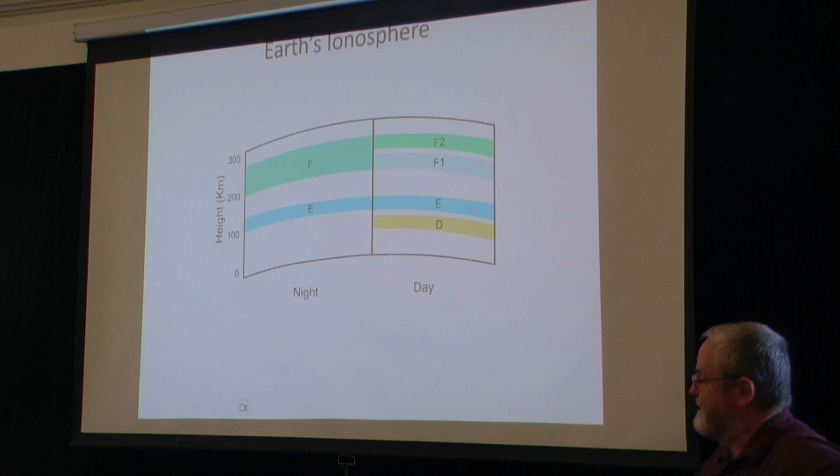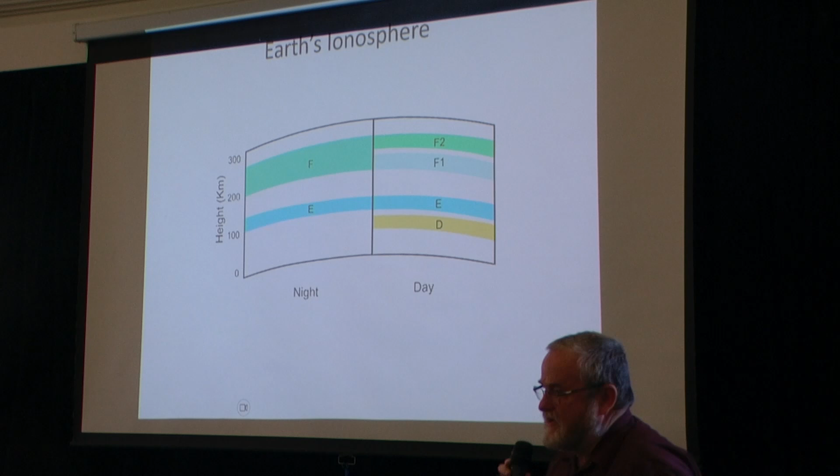So just a 30-second refresher on the ionosphere. I think most people in this room will have a good working knowledge of it. The section I'm interested in is the nighttime ionosphere, so I've distilled it down to just two basic layers.

The E layer, which was predicted in 1902 independently by two researchers, an American engineer, Kennelly, and a British polymath, Oliver Heaviside. Both hypothesised that there must have been some kind of refracting layer in the Earth's upper atmosphere. This wasn't proven until 1924 by another British physicist, Edward Appleton.

In addition, Edward Appleton also identified another layer which was known for a period as the Appleton layer. We know it as the F layer. For that investigation and discovery, Appleton was awarded the 1947 Nobel Prize for Physics.

So it's upon those two layers that all our international broadcasting between 2 and 40 megahertz depends. Without the ionosphere, without our atmosphere, without the stimulation of the atmosphere by the sun's emissions, we would not have international shortwave transmission as we all know it.

During the 1920s and the 1930s, broadcasting was kicking off around the world, and Australia, as always at the time, was crippled by the tyranny of distance. Beyond medium wave broadcasting, Australia had an imperative to look at economical broadcasting to more dispersed populations.

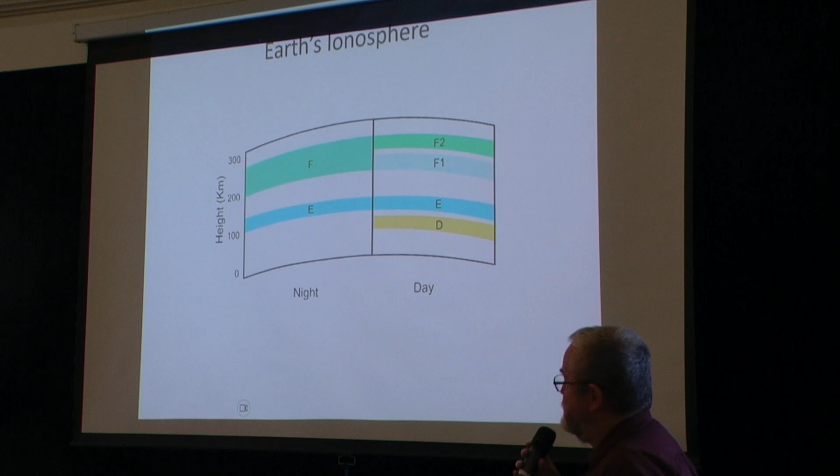To that end, in the late 1920s, the PMG radio branch established an experimental facility at Lyndhurst, just southeast of Melbourne, which was out in the sticks.

This photograph, I'm sure many of you will have seen before, purporting to show the early transmitter sites. That's actually a shed, that's the outdoor dunny on the left, that's a shed at the back of the Lyndhurst post office. There's not a transmitter inside, it actually held a couple of receivers and miscellaneous odds and ends, but it was on that site that the PMG radio branch, as opposed to AWA and its own commercial sites, began doing investigations into shortwave transmission.

So initially it was an experimental facility, and so late 1920s it had an experimental call sign. Anyone want to hazard a guess what that call sign was?

No, that was AWA. It's in Lyndhurst. It's a radio facility: VK3LR. The current VK3LR here, do we? The person who holds that call sign today, I hope they're aware of the legacy behind it.

I worked out that HF was quite a good vehicle for carrying broadcast programming to the inland and the islands, and so that was regularised from the late 1930s through until, in Lyndhurst's case, the mid-1980s with the call sign VLR and other related call signs.

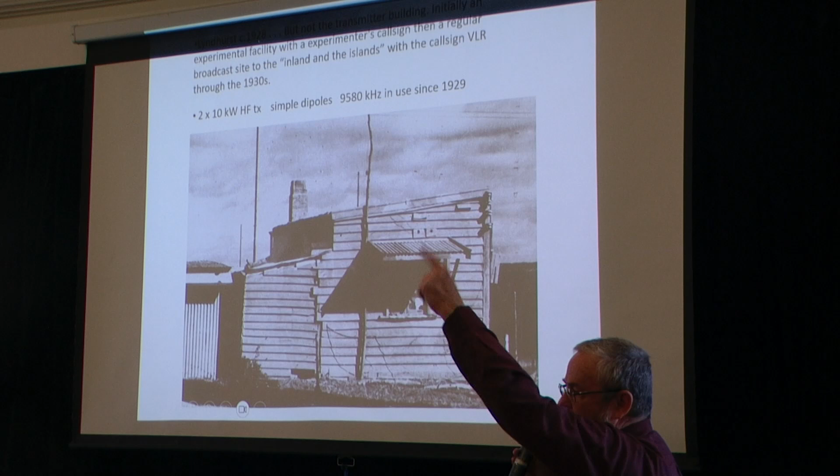So the transmission facility during the 1930s was quite basic. A couple of 10 kilowatt transmitters, simple dipole rows, so they were typically stacked dipoles without any reflector. So what you probably find in our amateur radio books described as a lazy H array: one horizontal dipole, half a wavelength above that, another horizontal dipole. It's a very easy way of getting considerable gain because you compress that vertical angle without generating myriad minor lobes.

The frequency 9580 kilohertz was in use from that site from 1929, and of course that became a very well-known frequency used by Radio Australia right up until its close, for transmissions into the Central Pacific and by extension into North America.

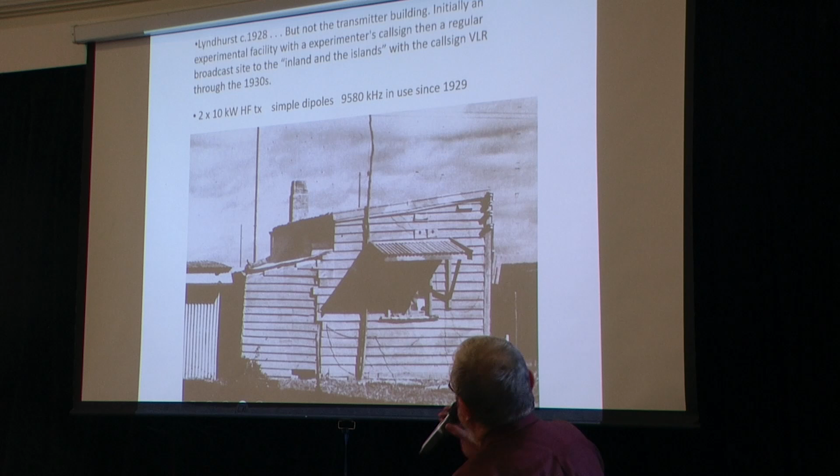And if you couple 9580KHZ with gmail.com, you've got my email address.

So we've moved apace, we're near the end of the 30s, we could all see this coming. Well, a few of them couldn't. As Churchill said, you had a choice between dishonour and war. You chose dishonour, but you will have war. And so it came to pass in September, we found ourselves again at the start of another world war.

During this period, Germany was miles out in front with its international broadcasting service, and the BBC wasn't far behind. The BBC was concerned it might lose its facility at some point. It knew it was within range of Luftwaffe bombers, so there was strong encouragement from the UK government to the Australian government to beef up its international transmission on a global basis. So not just looking at our immediate concern of Southeast Asia and the Pacific, but establishing a world-class, world-reaching HF transmission facility.

Initially, it was carried on the 10 kilowatt transmitters from Lyndhurst, but something better was required, and it was proposed by a British junior director of the BBC called George Ivan Smith. He was quite young at the time, had an illustrious career in the diplomatic corps, and I met George Ivan Smith out at ABC Radio Australia in 1989 on the occasion of the 50th anniversary of Radio Australia.

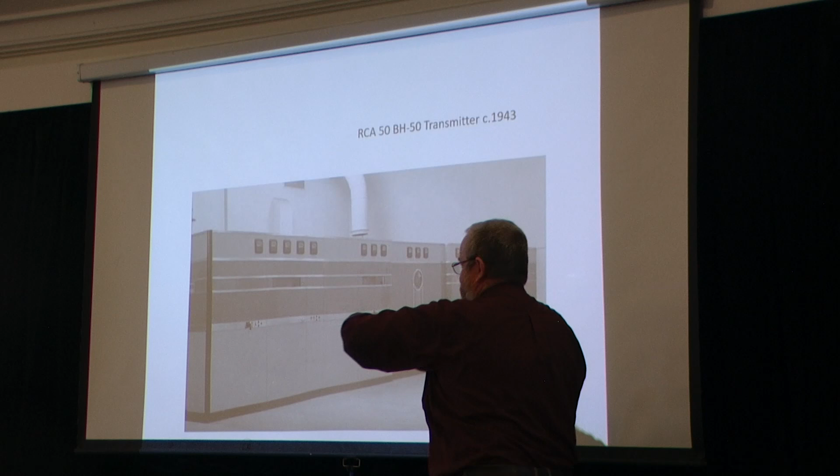It had an open top, and during the 50s or 60s the occasional hijinks went on - for a period of time, flying model aeroplanes were in vogue. Can you imagine flying 1950s or 60s model aeroplanes with little regenerative receivers over the top of 50, and just on the left-hand side, 300 kilowatt transmitters? Is there any RF floating around? Yes, probably about 150 volts a metre. So to try and improve reliability, they actually built in over the top of that transmitter, and that's how I remember seeing it.

So I mentioned that the RF stage had a pair of fat triodes in push-pull. That was an RCA 880. I've got one at home from Shepparton. Do you think I can find it? It's not all that big - it's probably about 600 mil high, but quite an impressive beast.

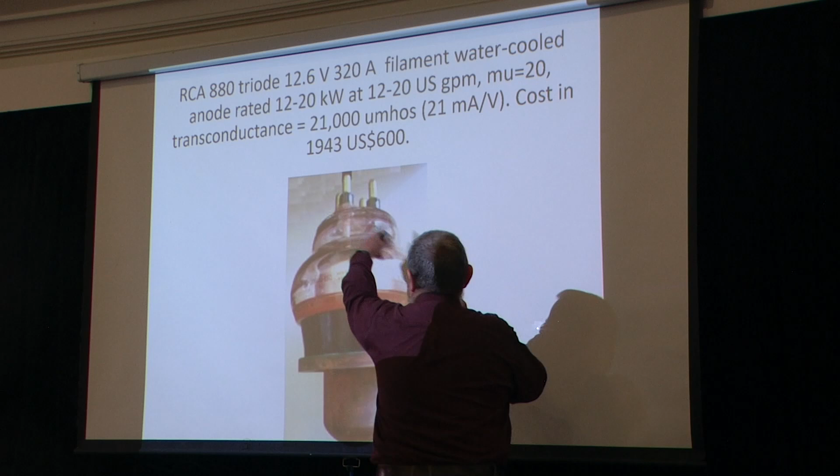If you're familiar with some of the other water-cooled 20 kilowatt valves, you've got the filament structure here, and a massive great projection out here. This one's folded back, so that anode continues up to about this point, which made it quite good for high frequency work. You'll notice the filament is rated for 12.6 volts, so it's ideal for mobile work.

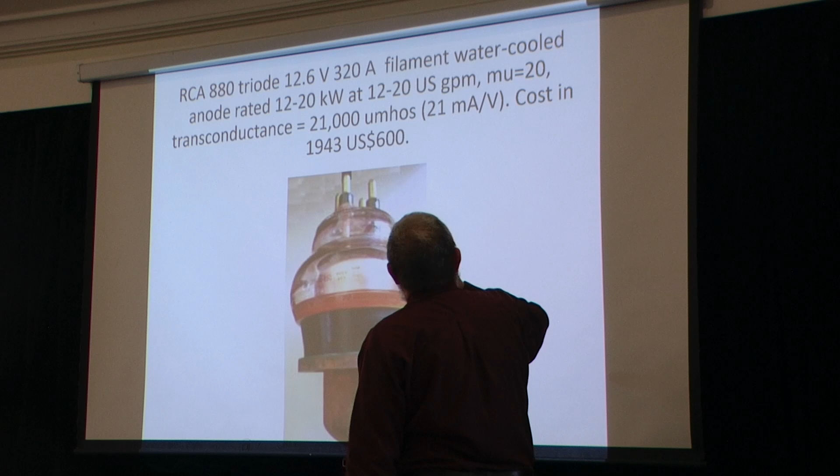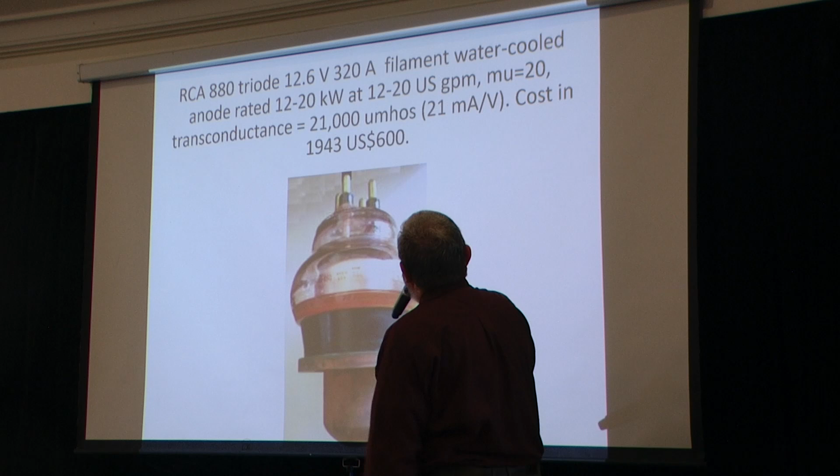Also, I'll let the Yanks get away with using these stupid US gallons - your anode rating is proportional to the gallons per minute you're pushing past that anode. I thought the transconductance was pretty impressive - that's a non-trivial transconductance. That valve, in 1943, I looked it up before I came here.

813s were $22; 833 triodes, common in broadcast use, were $76. This one's a bit dearer - it wasn't the dearest one at the time though. There was one that was $1,200, an 889, I think, from memory. Those valves are still available from a number of manufacturers, not just RCA, but also General Electric and Machlett.

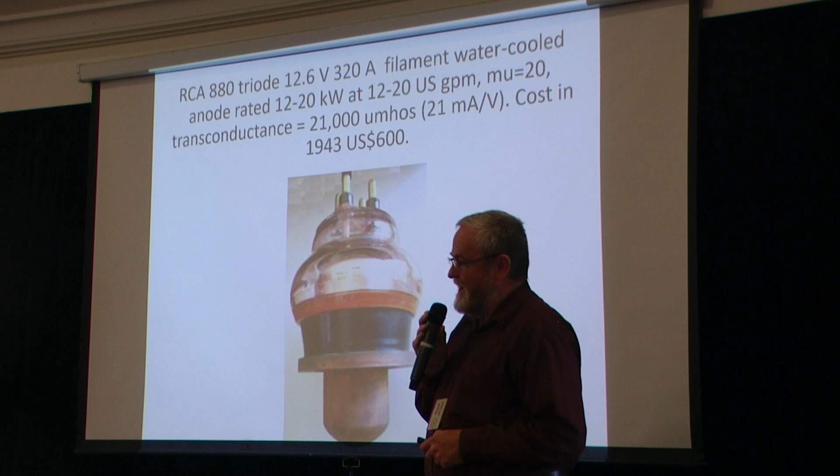So we've got these impressive transmitters, broadcasting all around the world. As many of you will appreciate, the number one feature of a transmitting station, particularly an HF transmitting station, is its aerial complement. It's all in the aerial - it begins and ends with the aerial. So we had quite a few of them. These were single band, first generation curtain dipole arrays.

So we've got a transmission station here on Verney Road. Those feed lines, 2,400 wooden poles across the site, which is why they shied at broken beer bottles - there's $1 for the swear box. Is Randall here today? I'll give him $1. There were these poles across the whole site, so they were very nervous about grass fires which periodically swept the site. Those feed lines are in the order of 3,000 feet, 910 metres long.

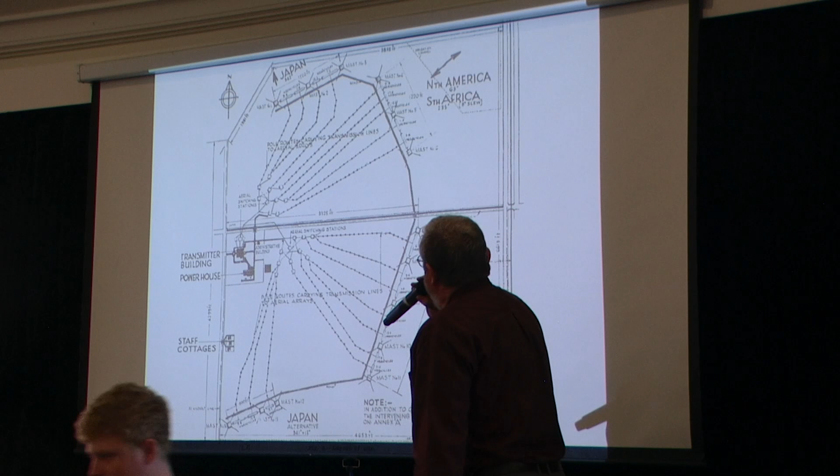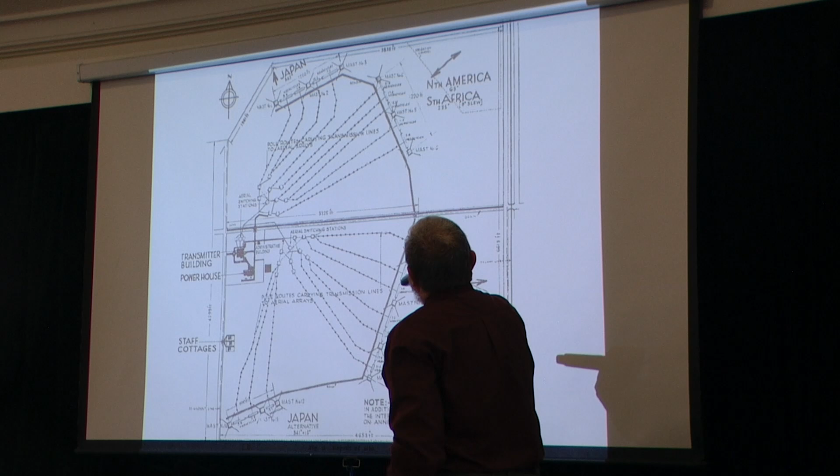So if we look at this one here, with a pointer - that one there - that's the 21 megahertz aerial for America, known imaginatively as A21. That 3,000 foot feed line at 21 megahertz had a loss of less than 1 dB. No poncing around with SWR meters - we put 50 kilowatts in, measured that, and at the input to the antenna panels we measured 40 kilowatts. There you go, 0.97 dB.

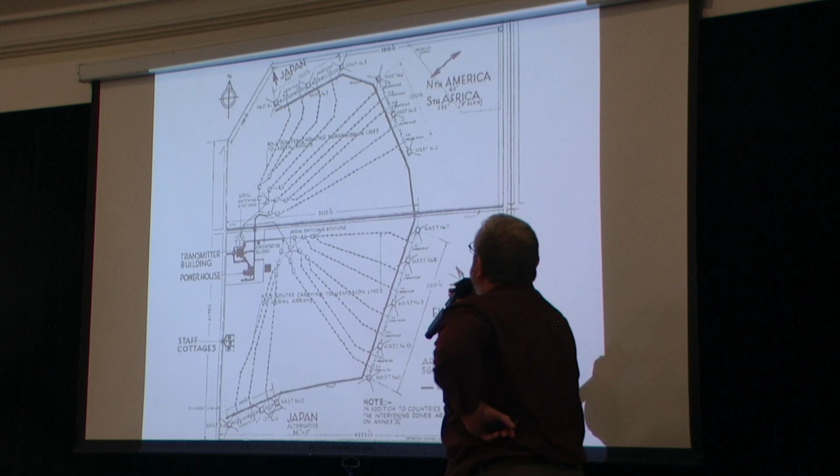So balanced feeders are certainly the way to go if you've got long feeder runs at HF. Now you notice that the bearing on those American group aerials is 63 degrees azimuth, which is quite useful because about 30 times a year you've got the moon rising up through that beam. That becomes crucial to our further discussions.

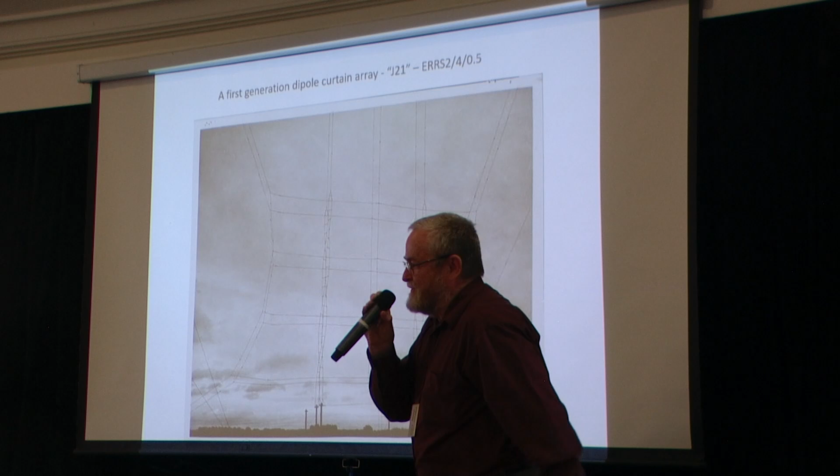Hand up who's read or who's got a copy of Radio 2. Good, right, okay, you can bequeath me a copy. I don't have one, I have seen one. You've got it? Terman - I need Terman, 1943 radio engineering, and a set of Radio 1 and Radio 2 would be delightful too. I'm prepared to cross your palm with gold, or donate to the charity of your choice.

So what we're looking at here is a first generation dipole array.

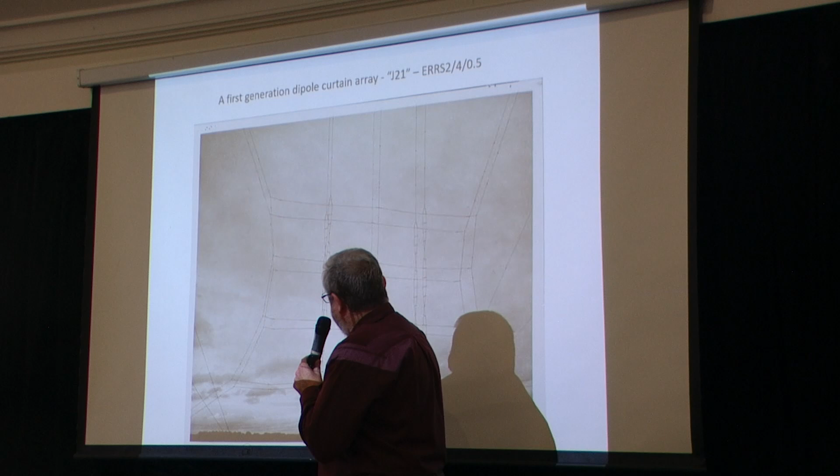We have four, and these are actually half a wavelength each. Okay, we've got 1, 2, 3, 4. So we've got 4 dipoles stacked vertically. This dipole's half a wavelength above ground, and there's half a wavelength between the ones above it.

And then immediately behind that we have an identical array of dipoles which are passive but attuned to function as reflectors. This is a one band affair, so about 2% bandwidth, not too bad.

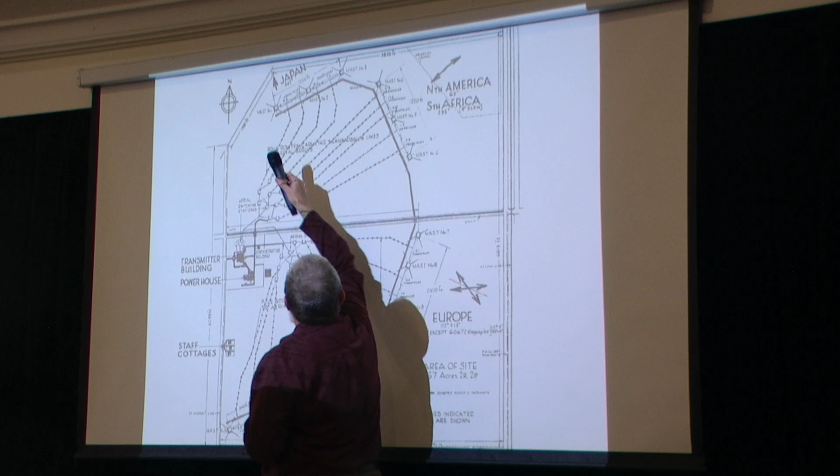This particular one was J21, so it's not an original. If you look at the J group, all those J group areas are still standing today. All these are gone and been updated. The J group, the J21 doesn't appear up there, so it came later, probably during the early 50s, but it's represented.

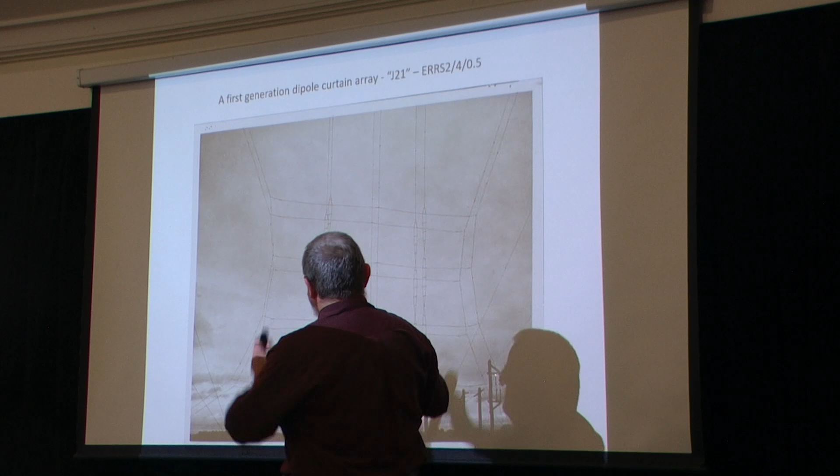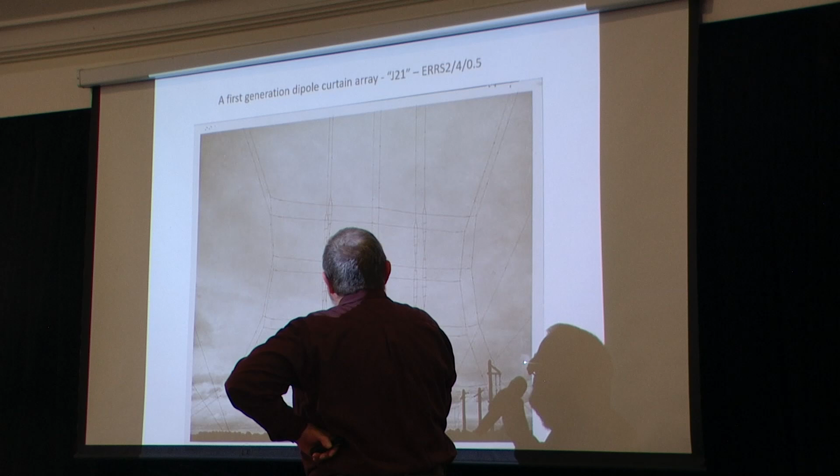So there's the 21 megahertz aerial. We're looking at front to back ratio about 15 dB. Azimuthal beam width plus or minus 18 degrees, and a take-off angle of 9 degrees, plus or minus about 4. So quite a constrained pattern, and a very clean pattern compared to

the other aerials which were in use at the time, particularly rhombics. Rhombics are cheap and cheerful. Some unkind people say that it's an aerial that radiates badly in all directions. It's certainly a grubbier pattern than that.

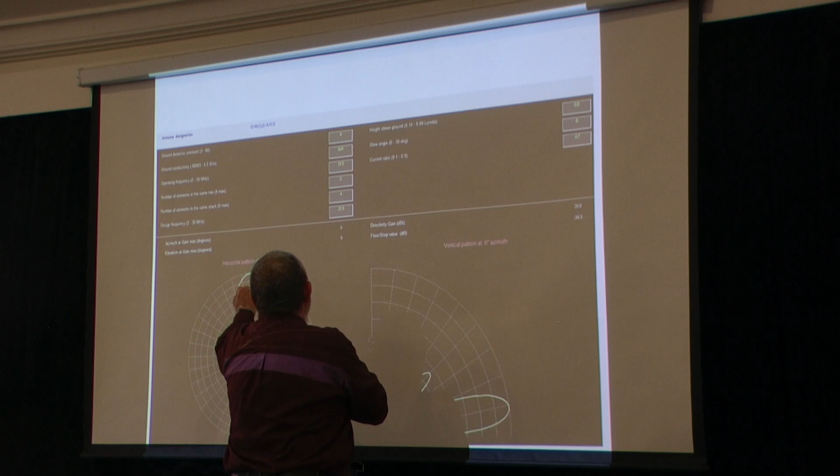So here's that aerial you were just looking at before. A single band aerial, so design frequency equals the operational frequency, and we've got a very clean lobe. The main lobe, plus or minus 18 degrees at the half power point, those are 3 dB increments. Take-off angle, 9 degrees. So the array is 4 half wavelengths high, so how many lobes in elevation do we expect to see? Also 4. And you can see that they're just there.

This is the one we're interested in. The other 3 we don't worry about. That one is 10, 20, 30, 40 degrees. 40 degree takeoff angle at 21 megs. It's almost certainly going to blast into outer space. We're not worried about that.

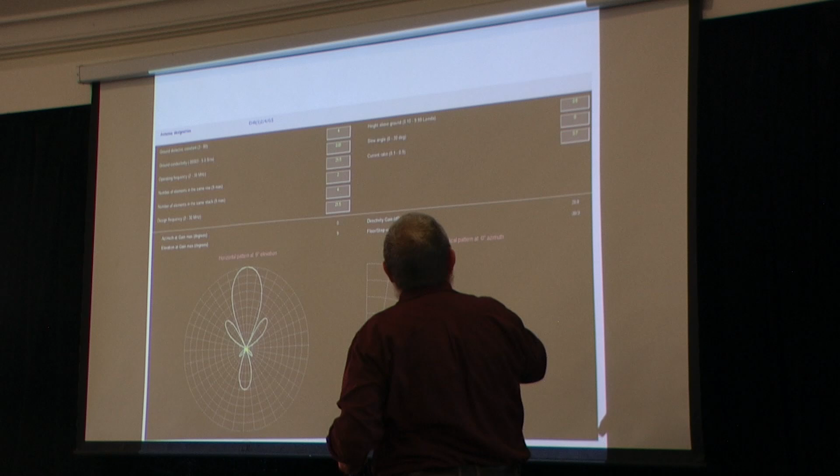So that was the aerial that attracted the interest of CSIR. And during the war, a lot of interest was taken in developing radar systems. So there are a lot of very brainy people who were working at these unspeakable frequencies of 200, 400, 900 megahertz, other unnatural environments, and they came to take an interest in what we could do after the war with all this technology and knowledge.

When was the first moon bounce, or first recorded detection of moon echoes, undertaken? Anyone offer an opinion? Go on. Americans were detecting Russian radar reflected off the moon in the late 1940s. That's interesting. In the 1940s, Operation something or other was American Army operators running a system on 111.6 megahertz with 800 watts of power, 1946.

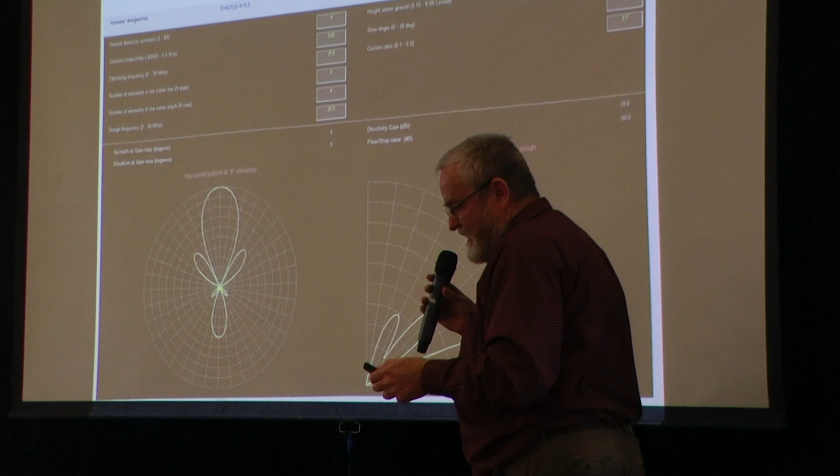But they were actually beaten by a pair of Germans, Wilhelm and Willy, in 1943, at a German radar research establishment. They detected the echoes of their radar transmissions from the moon. So it's actually 1943 that it was first detected, for some reason they couldn't write about it at the time. But there were also enterprising amateurs. Remember that there was no real distinction between amateur radio operators and bleeding edge radio propagation researchers at this time. Some of the amateurs were up there with the best of them.

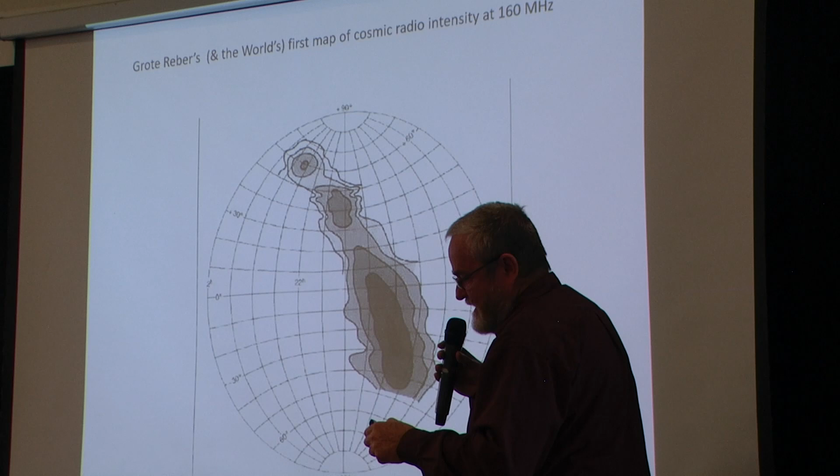This was just the start of what became a very enthusiastically invigorated field of scientific endeavour.

Let's go back to radar, 1942. This is at Dover Heights, just south of Sydney Heads. The radar on the left is a 200 megahertz facility. You'll notice that there are Army personnel in both cases.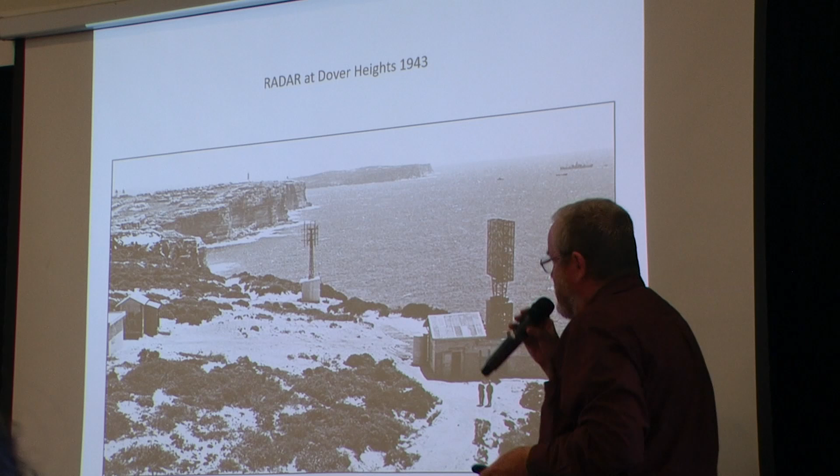The facility after the war was handed over to CSIR, who had just recently brought back... that's the aerial supervisor at Dover Heights. So this equipment was handed over to CSIR, who were getting together a lot of their former staff.

The chap on the right, all 192 centimetres of him, is Joe Pawsey. He was the head of CSIR's Radio Physics Laboratory, and he encouraged a lot of his budding postdoctoral researchers to investigate radio astronomy activity above 100 megs.

What's that? Come on, give me that. Thank you. You get the video.

That's a gamma match, not the best method of matching coax to a dipole, but it was popular for a few decades, and that was a brief legacy of this chap amongst amateurs.

But he had a much bigger impact on radio physics laboratory. The chap on the right is Alex Shain. Unfortunately, his brilliant career was cut short and he died of cancer in 1960.

The chap in the middle, always impeccably dressed with waistcoat, tie and jacket, was Charlie Higgins, what you'd call an STO 2 or 3 in the parlance of the day. He didn't have a PhD, but he had a brilliant mind. These two were working on radio astronomy at frequencies under 30 megahertz.

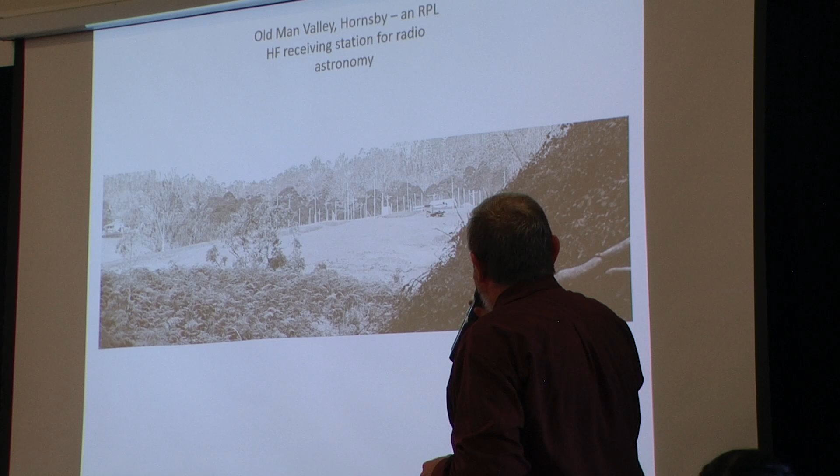So we have this site, Hornsby, some kilometres north-west of Sydney, I don't know exactly where. The old Man Valley's still there, it's now a BMX bike track. You can see it's quite a picturesque one.

They covered this area with dipole arrays, horizontal dipole arrays, using the ground as a reflector. Some were set up as transits, using the Earth's rotation so that the arrays would be phased at maybe minus 32 degrees declination, giving a transit sweep of parts of the sky. These guys were analysing the sky at 9.15, 18.3, 19.7 megahertz - frequencies we're not accustomed to regarding as appropriate for radio astronomy.

Shain actually made measurements of signals he was observing around 19.7 megahertz, and it wasn't until later that some Americans analysed his data and said they think they're coming from Jupiter. So Shain actually discovered the Jovian emissions, which were around about 15 megahertz.

So, Marty, what are those two valves up the top? No, you know what they are. Have a guess. You had a transmitter with a 2 or 3 or 4 of them in it.

A pair of 807s. This is built by PMG Radio Branch to mess around with the RCA 50 kilowatt transmitter. The three bigger tubes, the jumbo-based tubes, I think they're thyratrons - mercury thyratrons, judging by the messaging. I don't think they're xenon or hydrogen.

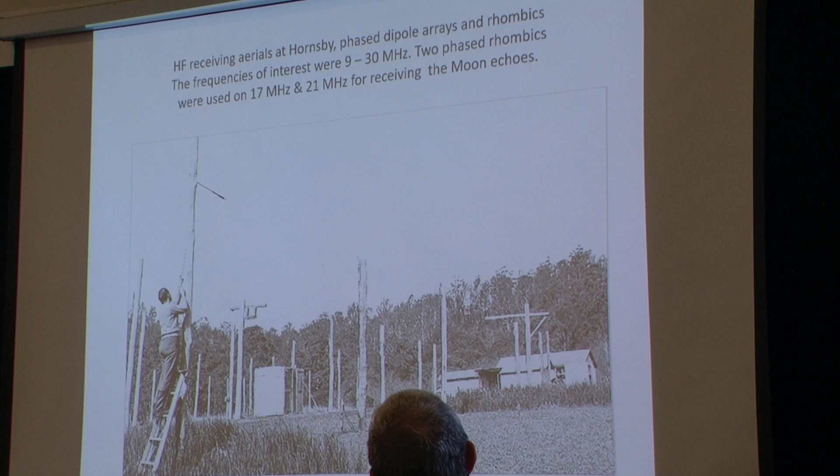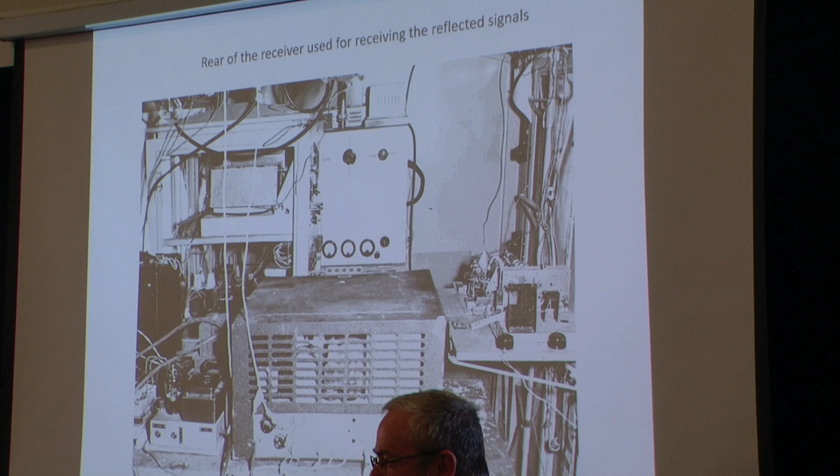This was some of the gear made to display the signals received from the moon echoes. The bottom part was a long persistence cathode ray tube with a persistence of around 6 seconds. Up the top we had aural detection, which as it turned out was about 2 to 3 dB more sensitive - so just using your ear was more sensitive than using the cathode ray display.

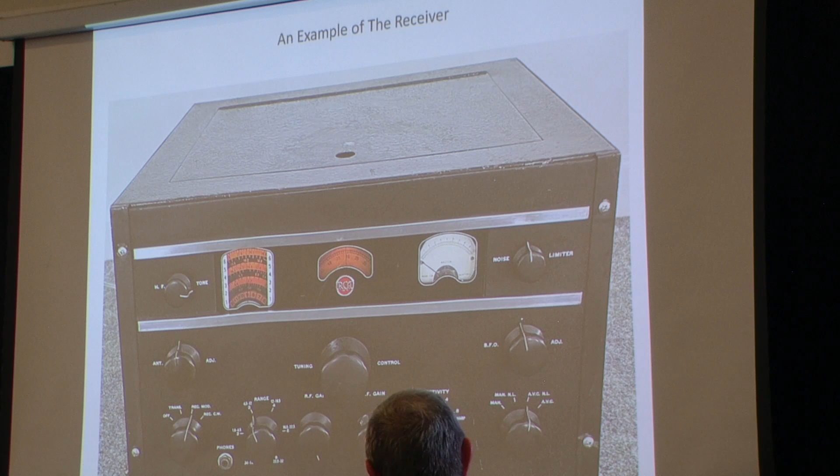Yes, there we go. It was an AR88, not that one. So there was a suite of signals.

Some of them were long pulses designed to analyse the signal coming back through the ionosphere. To locate the echoes in the first instance, they would send a series of 3 quarter-second pulses. The pulse gear was at Shepparton, keyed from Hornsby with a landline.

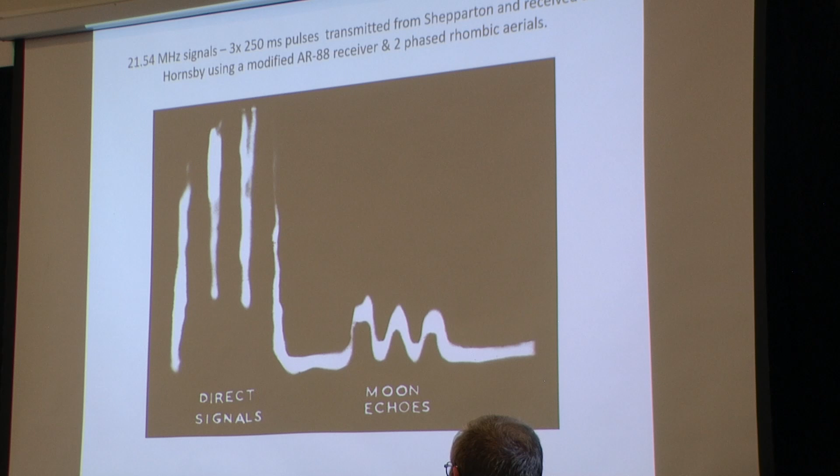So we're looking there at about less than a second of pulses. The fourth one is a little bit of E-scatter, and then you've got the moon echoes.

So once you've detected the signals from the moon, you could use a range of other pulses. These ones here, this is a display of 3 echoes. You see that they're fairly closely spaced in time. The echoes coming back are suffering interesting ionospheric degradation. This is at 21.5 megs.

And there's also another set of signals where they were sending 1 millisecond pulses at a 40 hertz repetition rate, which was designed to get a profile of the lunar surface.

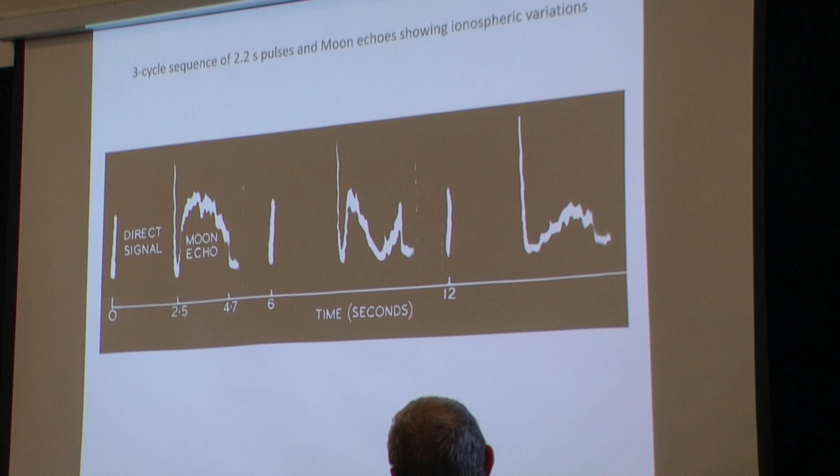This made such an impact, and I've got my notes - this made such an impact that in 1952... this was happening in 1947 and 48, there were 30 days where trials were undertaken and reflections received on 24 of those occasions.

There were 2 receiving sites in Australia. One was at Hornsby, and there was a secondary receive site at Rockbank, just out of Melbourne. That was run by OTC before Defence took it over, not quite as good a performance as the Hornsby site.

Anyway, so we had the International Union of Radio Science, which is still with us today. They had a congress in Sydney on the strength of Shain's publication. So Shain, a chap called Kerr and Higgins published in 1950, and it would cause quite a stir.

So that's an interesting photograph there. We see Edward Appleton, the chap on the left in the overcoat. He's a character who confirmed Kennelly and Heaviside's prediction of an E layer, and then went on to discover the F layer. The chap in the middle was Edward 'Taffy' Bowen.

He was the head of the radio physics laboratory, and then next to him we have the lanky Joe Pawsey, who was overseeing the radio astronomical research.

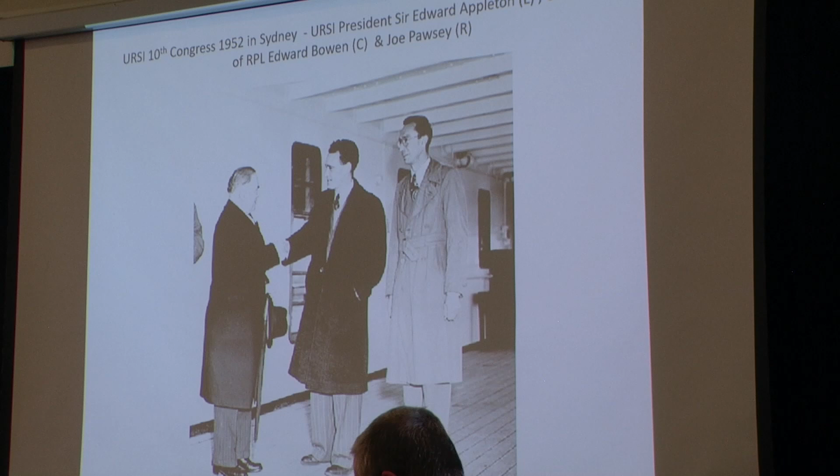So that's another slide. These are dignitaries from University. And of course, as a lot of researchers, you've got to publish it.

So they were surprised that the signal strengths were way below what they predicted. Now, bearing in mind, this was happening in June 1947 for about a year through into mid-1948. The T-index then, solar activity if you like, was about the same as it is now. So over that year it went between about 130 and 160 if you're familiar with IPS and T-index.

The tests had to be done at about 0200 to 0500 in the morning, because if you did it during daylight hours with a sunlit ionosphere, the frequencies wouldn't get to the moon, they'd get to North America, where the broadcasts were originally intended to go.

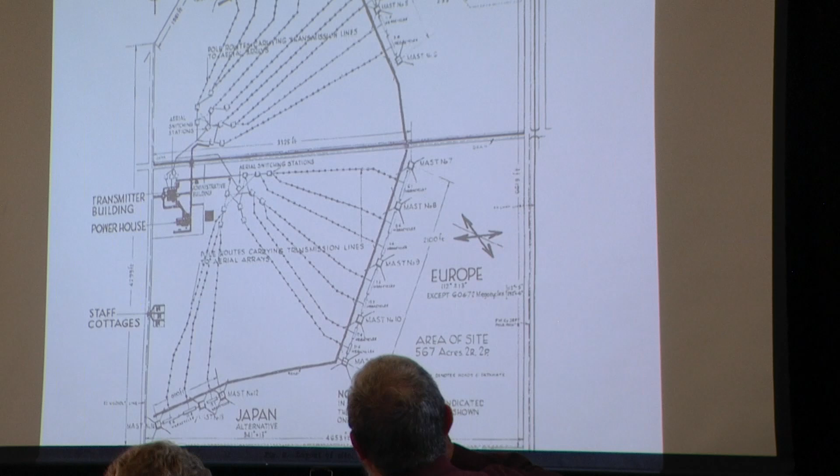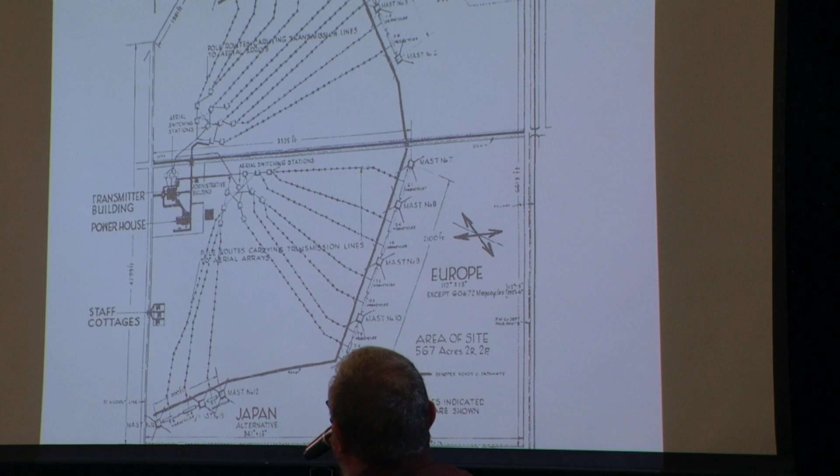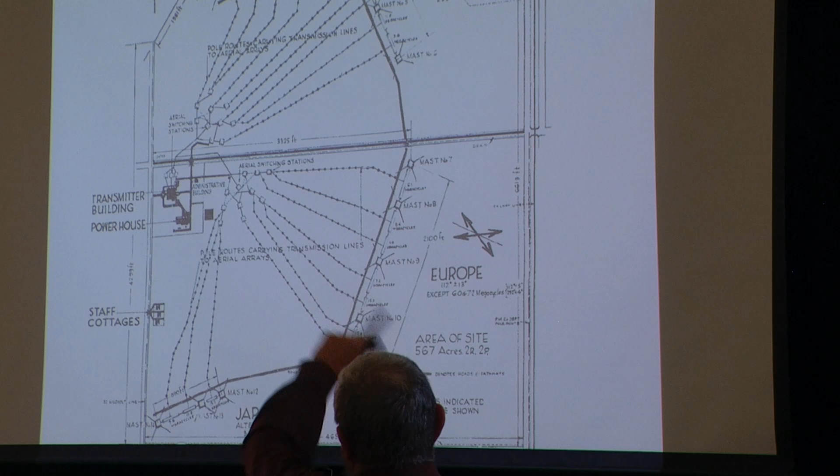That's a drawing I took from S.H. Witt's excellent papers in the Telecommunication Journal, circa 1946 - I think from memory it's volume 6, number 3. In the succeeding issue he outlines all the plant on the site.

So that's existing - the transmitter building's existing, the powerhouse is existing without the generators, and the cottages disappeared about 30 years ago. The black square is a 100,000 gallon dam on site to hold rainwater, for when we had water-cooled valves. This site here...

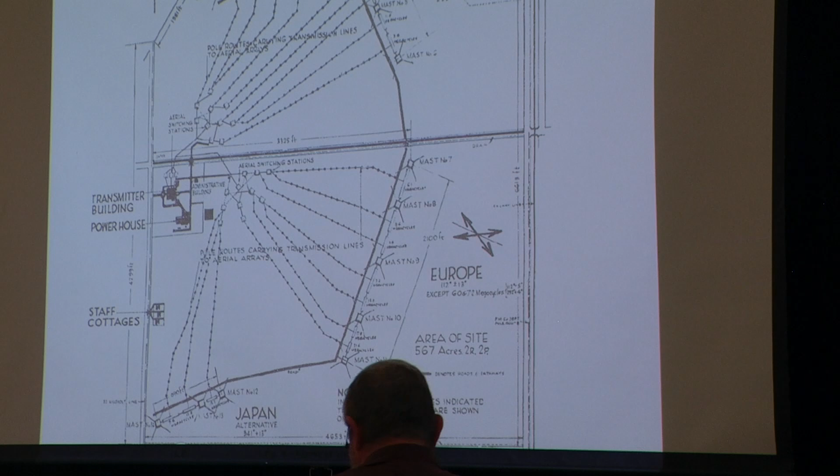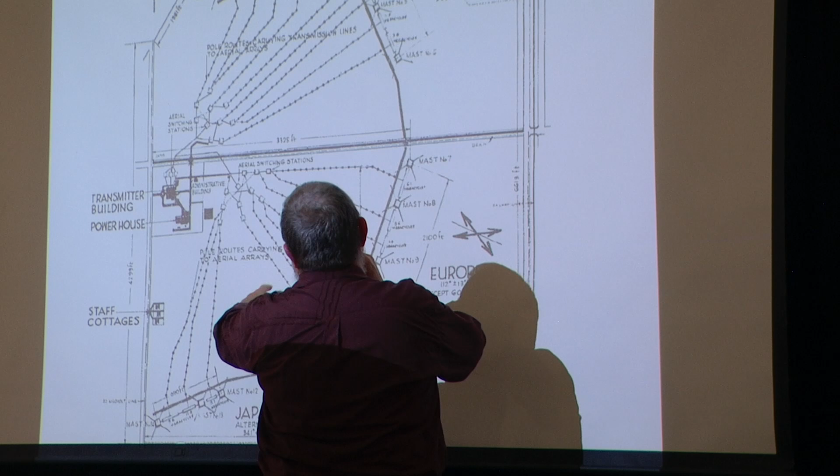We've now got the Pacific Group aerials down here. They're broadband arrays - curtain arrays, aperiodic reflectors - and typically cover one octave, so 6 to 12, one big aerial instead of having 3 or 4 aerials to cover that range. So we have aerials in here and the J group.

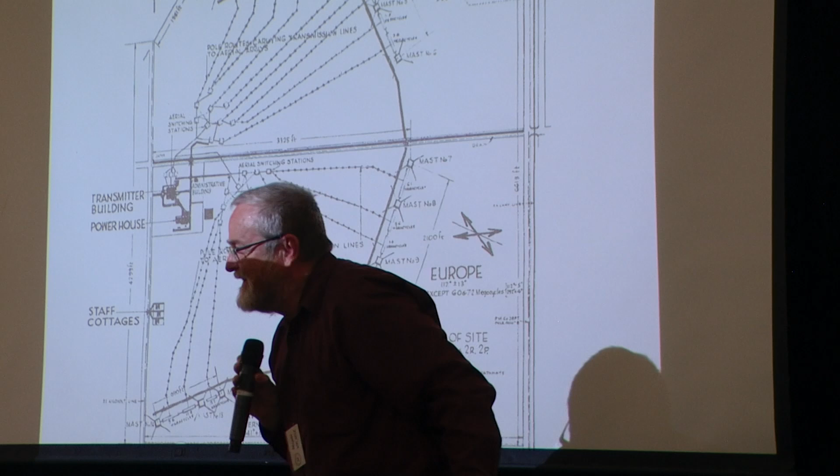Anyone else? Drew? Yeah. I don't know who did it, I have nothing to do with it, it's nothing to do with me. I deny all knowledge.

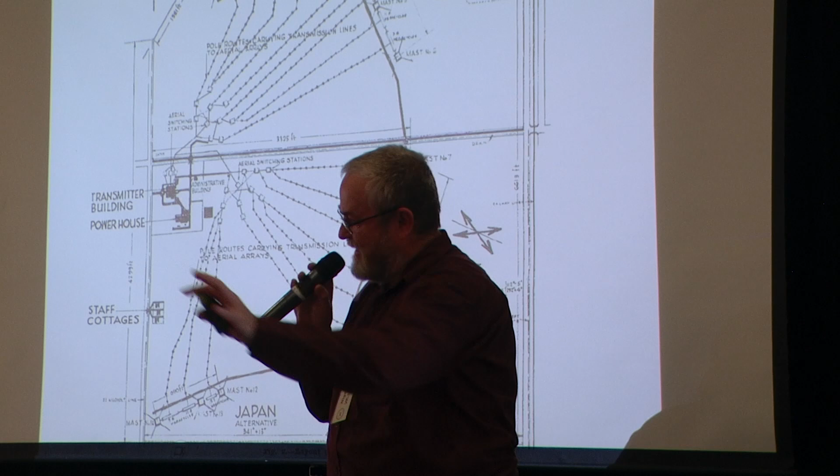Well, I hope you've all seen Dave Stewart's YouTube clip. I felt like I was shooting my favourite dog - it's not a pleasant sensation, because it's not just all the staff around, the immediate staff, the staff who have gone before. I've visited every little fly speck across the Pacific, every little atoll - yeah, okay, we've got lots of lovely satellites up there, but have you ever seen what a passing cyclone does to a C-band satellite dish? There it goes. So I saw firsthand, probably, the heyday of HF was probably 1960 to 1990, and in that period BBC World Service was preeminent.

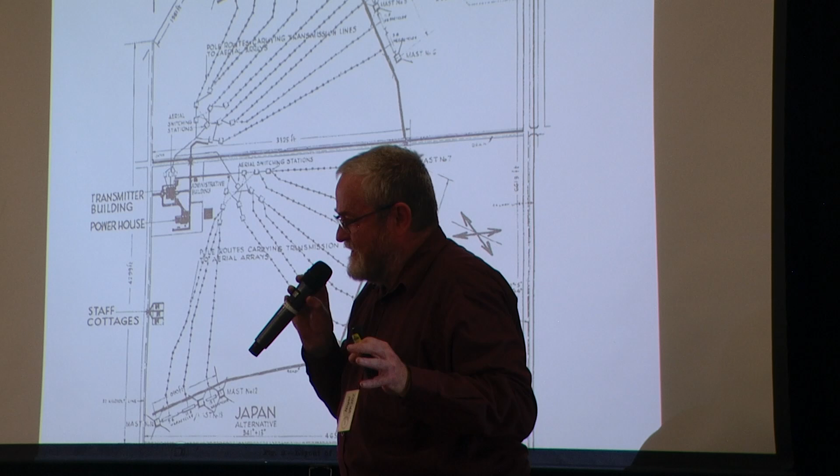But the number 2 and number 3 positions - and this is based on regular worldwide assessments of HF listeners - were shared between Radio Australia and Hilversum, Holland. We were both broadcasters who punched way above our weight. You had Radio Moscow in that period, VOA of course, Deutsche Welle, Radio France Internationale - they all had huge budgets, orders of magnitude greater than ours. But people recognise BS when it's waved under their nose.

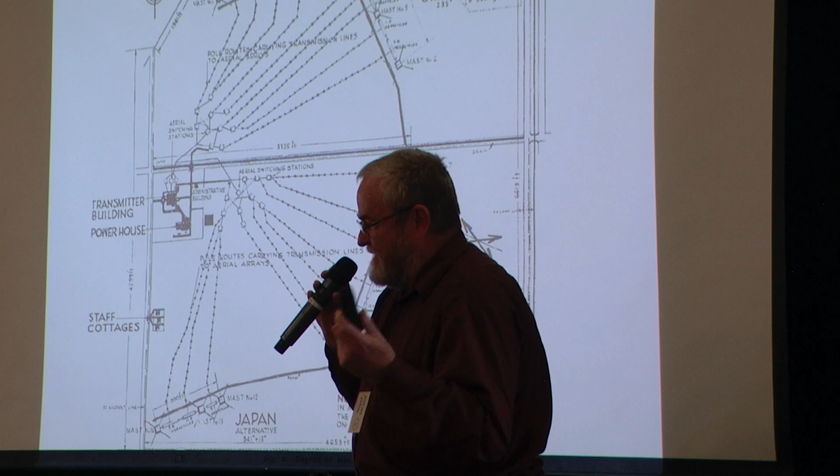Whereas Radio Australia, we were rarely if ever jammed by PRC, even in the wake of the Tiananmen Square incident, because our reporting of news was deemed to be impartial, comprehensive, and basically reliable. The BBC said Radio Australia was the number one corroborative source of news around the world, and the number one source of news for the Pacific regions. That's the only way you can maintain your credibility - in spite of all adversity you've got to remain impartial all the time. Without that, you have no legacy, you have no foundation.

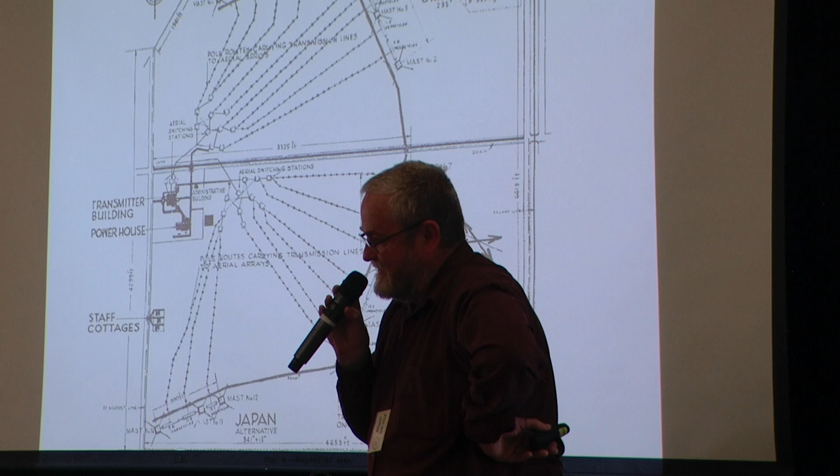So Radio Australia's gone from HF, but apart from Sangean and Tecsun, who makes an HF receiver anymore? They're gradually diminishing across the areas where we had HF audiences, and I don't think it's going to come back anytime soon. Anyone else? Right.